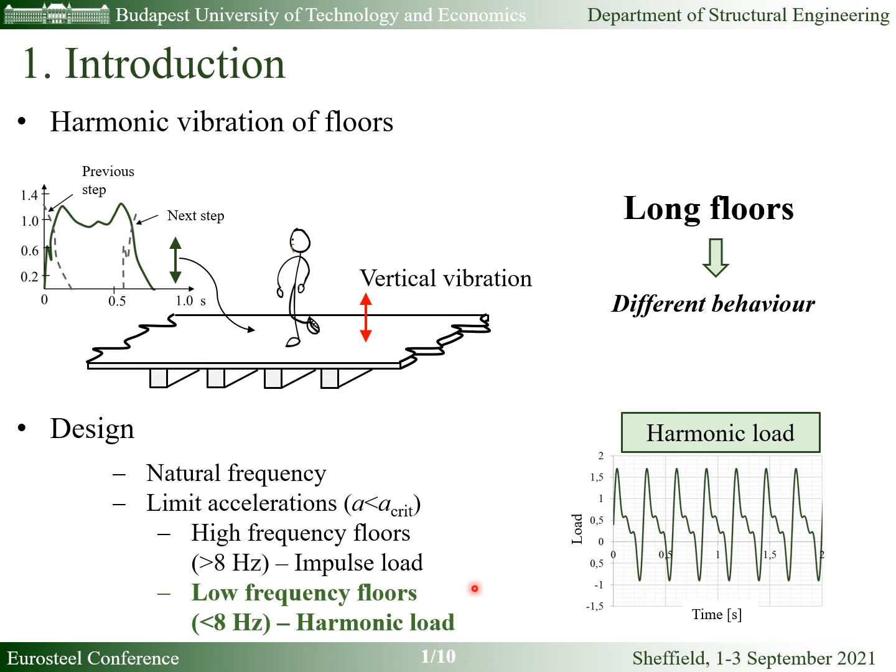There are several suggestions in the literature on how we can calculate long floors and the maximum accelerations which can occur. First we need to calculate an effective width, which basically gives us a beam that is a portion of this floor. From this beam we can calculate the modal mass, and with that modal mass and the maximum magnification factor of a single degree of freedom system, we can calculate the maximum acceleration at the resonant point.

However, this given effective width has no physical background, or this physical background is not clear. Our goal was to check the actual physical behavior of long floors and, according to that, calculate their response, their acceleration.

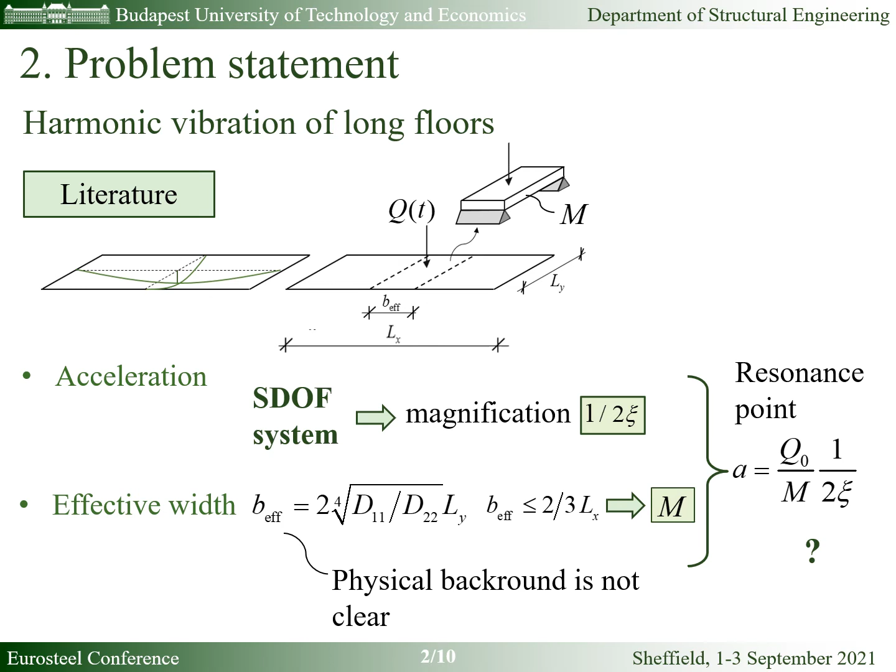In our analysis we investigated long floors, and in these cases there's an extra energy dissipation in the system because of the so-called radiation damping. It's basically caused by wave propagation to infinity, and it's very important to say that in case of rib-stiffened orthotropic floors, a slab with a side ratio of 1:1 can also be mechanically long.

Two cases were investigated to give our formulae. For a half sine load, we made an analytic solution, and for a concentrated load, a numerical solution. According to that, we try to give a formula for the effective width and for the dynamic magnification factor, and we compare them to the formulae given in the literature and the current design codes.

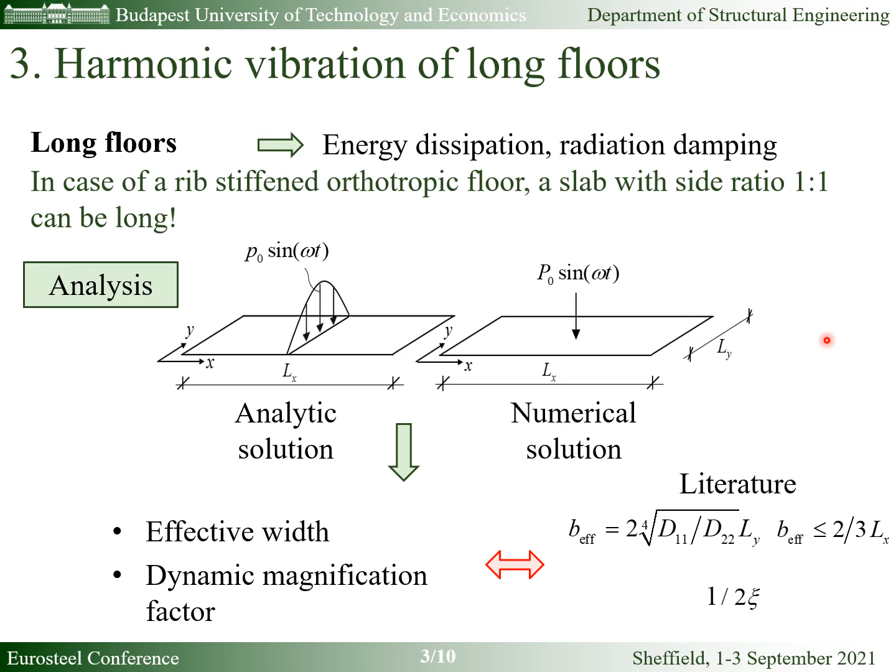First, I will present our analytic solution for the half sine loading. Here you can see the differential equation of a simple orthotropic plate, which can be simplified by the Levy solution. If we set the theta value to 0, we get back exactly the differential equation of a beam on elastic support. Or if we set the D11 stiffness value to 0, we get back the results of an axially constrained bar.

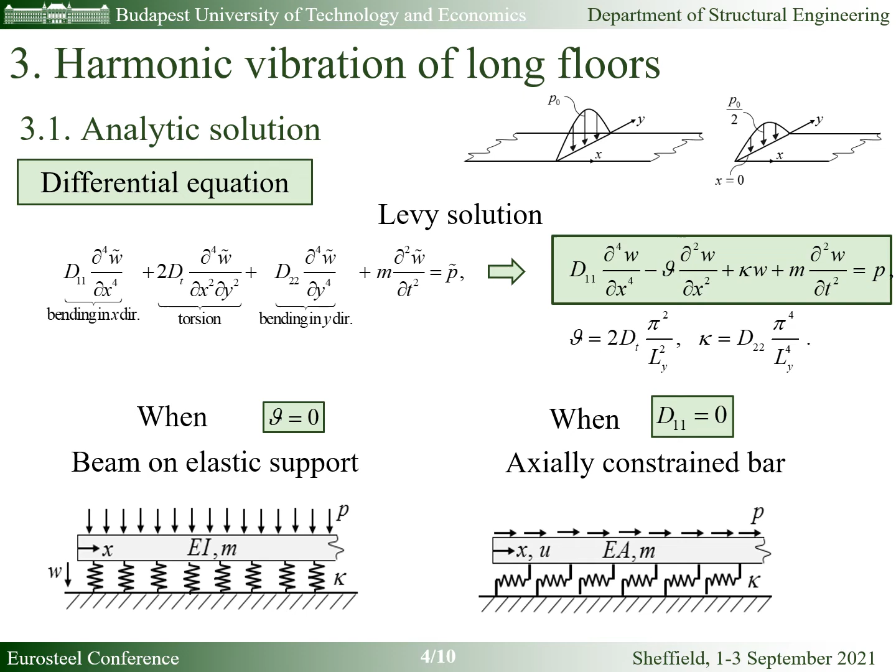So first we derived the solution of these simple cases when they are infinitely long and converted them to a simple SDOF system. In an SDOF system with Xi structural damping, the maximum amplification factor at the resonance point is 1/2Xi, and before and after the resonance point the phase angle is 0 or 180 degrees. However, in the infinitely long beam and bar, we have a much higher energy dissipation.

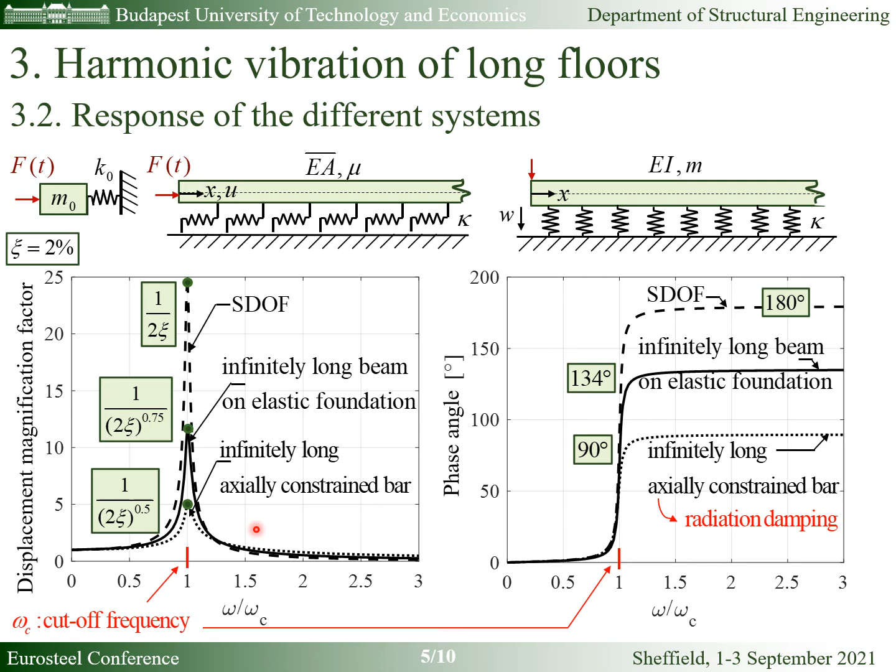For an infinitely long axially constrained bar, the phase angle after the resonance frequency, which in these cases can be called the cutoff frequency, is 90 degrees, which is basically equal to the energy dissipation of a dashpot-mass system. Also, the maximum amplitudes are lower because of the same phenomenon. For beams on elastic foundation it's 1/2Xi to the power of 0.75, and for axially constrained bars it's 1/2Xi to the power of 0.5, which are much different than for a single degree of freedom system.

After that, we also derived the magnification factors at the resonance point for different types of long floors. As I mentioned, if the plate has no torsional stiffness, we basically get back a beam on elastic foundation. So this maximum amplification factor will be 1/2 Xi to the power of 0.75, just as before.

We also checked another case, the Huber orthotropic plates. In this case, this amplification factor, the maximum value in the resonance point, can approximately be calculated with this given formula.

Here you can see a diagram which shows the exact value of the maximum amplification factor in the resonance point as a function of the side ratios. However, the side ratios are also normalized with the ratio of stiffnesses. As we can see, the given formula here, shown with a red line, can be used approximately from the ratio of 5 to 10.

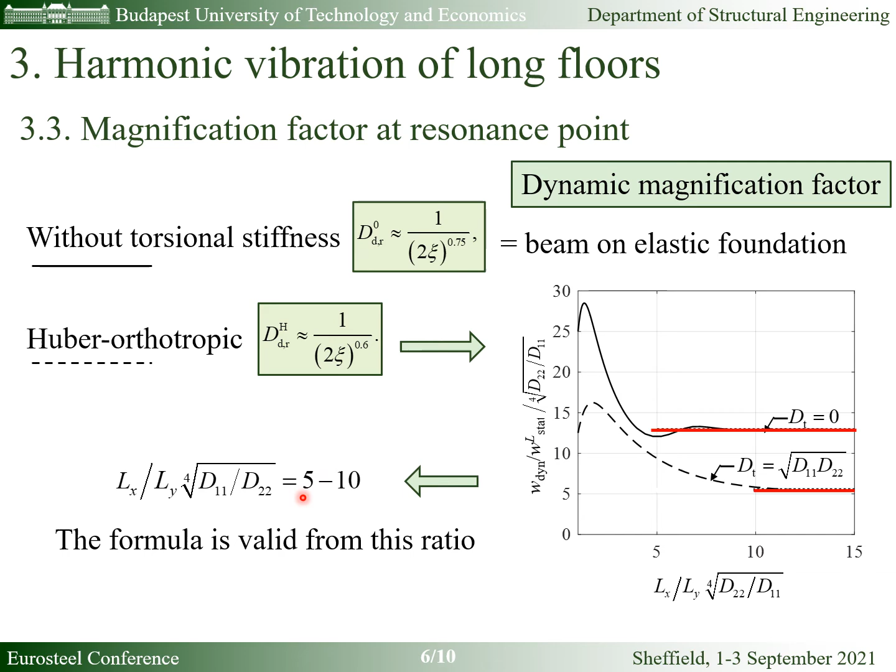We performed more numerical examples. Here I would like to show only one. We were examining the floors of a new campus of the University of Physical Education. These were huge reinforced concrete floors with steel beams.

Here the longer side of the floor is 95.7 meters, the shorter is 54.8 meters, so the side ratio is 1.74. However, if we normalize it with the stiffnesses in the two directions, this ratio will be 8.44, so basically we are here in this diagram, which I also showed you in the previous slide.

Here you can also see the amplitude and the phase angle of this floor if one person is jumping in the middle of the floor. The maximum value of the amplification factor is 10.3, and the same value with our approximation formula would be 11. So we are much closer to this value than the value given by an SDOF system, which is basically more than double the reality.

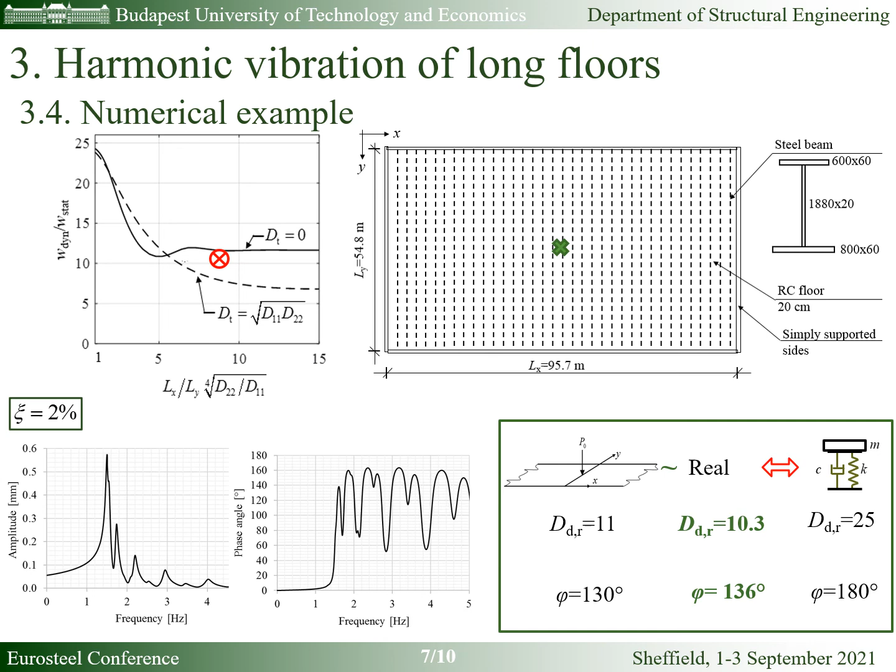However, these two values, the effective width and the amplification factor of a single degree of freedom system, in the case of a long floor have no physical meaning, no physical background. And of course, for different damping ratios and for different types of plates, this value from the literature and the exact solution are not even close to each other. They will give high errors.

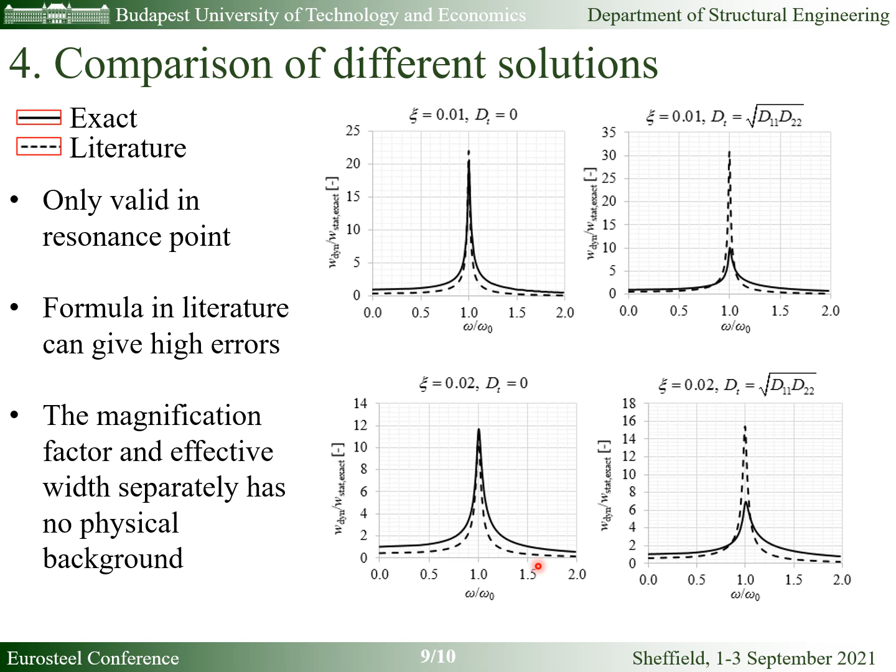So, as we have seen, rectangular orthotropic floors with realistic dimensions may behave in a significantly different manner than single degree of freedom structures. The amplification factor in the resonance point is much lower than what we use in the case of SDOF systems, which is actually caused by the so-called radiation damping.

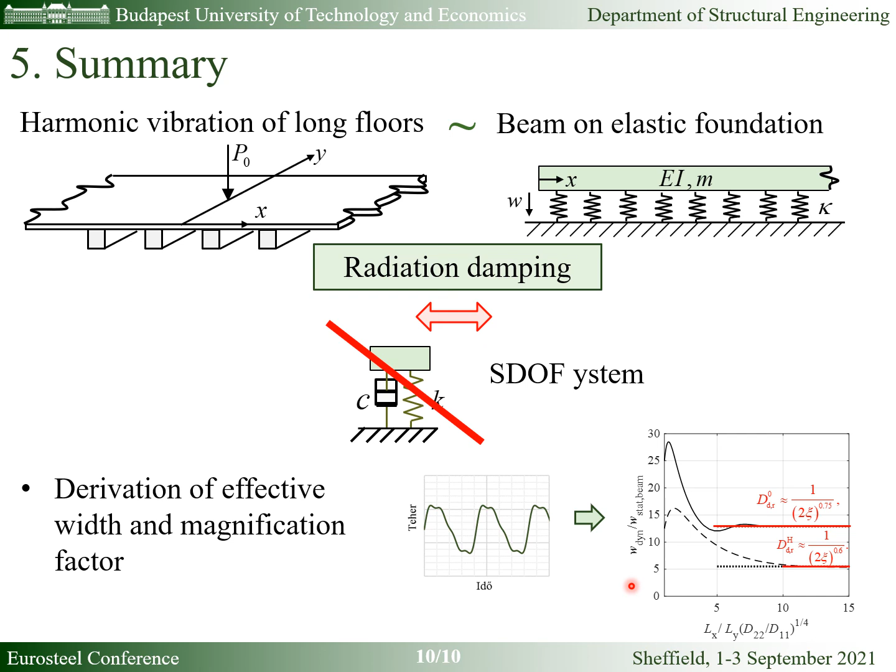Based on an exact and a numerical solution, we derived approximate formulae for the maximum of the amplification factor and also for the effective width, which we can use for long floors. And the advantage of these formulae is that they also contain the physical background, the physical understanding of the phenomenon.